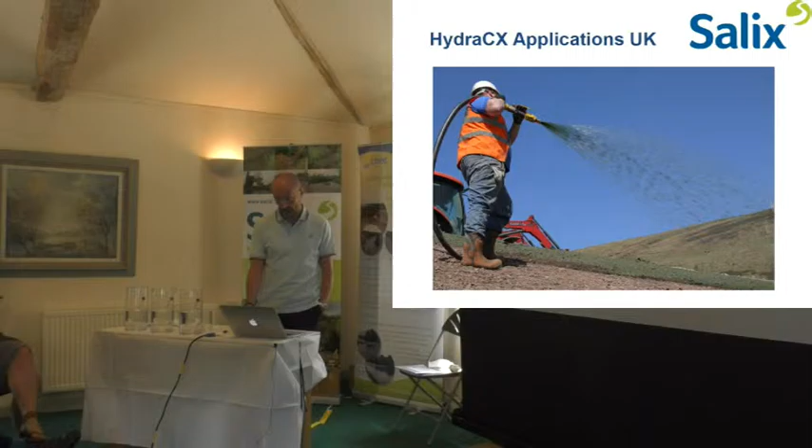Do I just press that? Yes. All right, okay.

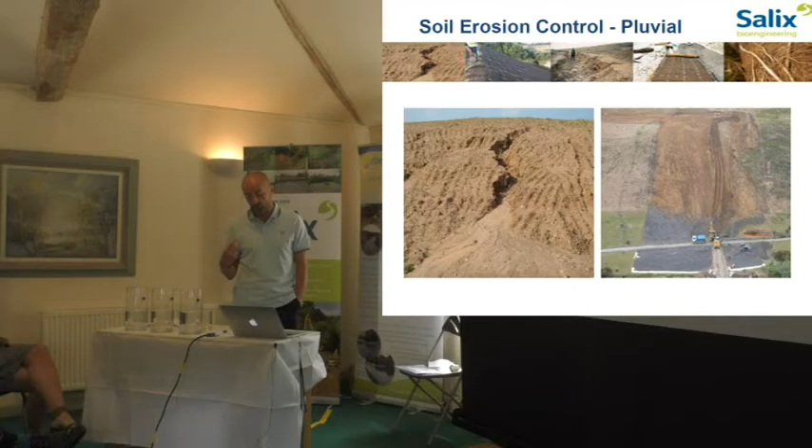So David's been talking, and most of the schemes that have been discussed have always been about fluvial processes. With HydraCX, it's simply for rain erosion, so pluvial scenarios, rain erosion typically rather than channels. We don't use it for channels because it would get washed out. But where we're using it is more for bank protection and vegetation establishment.

So your old style way of doing it, still done today, is a series of different materials. We go from open jute netting, the cheapest form, to biodegradable blankets. And then this shocker here is on the M25, where the local contractor bought the cheapest, nastiest bit of plastic matting he could find, and he's rolled it over a fairly small embankment. It's so dense, this stuff, 6 months later nothing had grown through it.

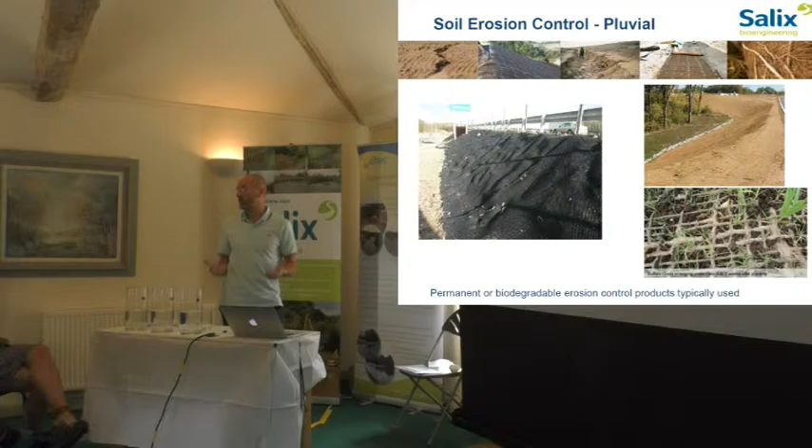It's fairly appalling. So what we want to do is try and get away from having to use rolled erosion products when you don't always need to use them. Hence the idea of using this HydraCX.

So basically, what is it? I came back from America. We went over the first time with a sample. I got stopped by the guys with their dogs and everything, because I was carrying a bit of this stuff in my pocket, and it does look like something you could smoke rather than spray.

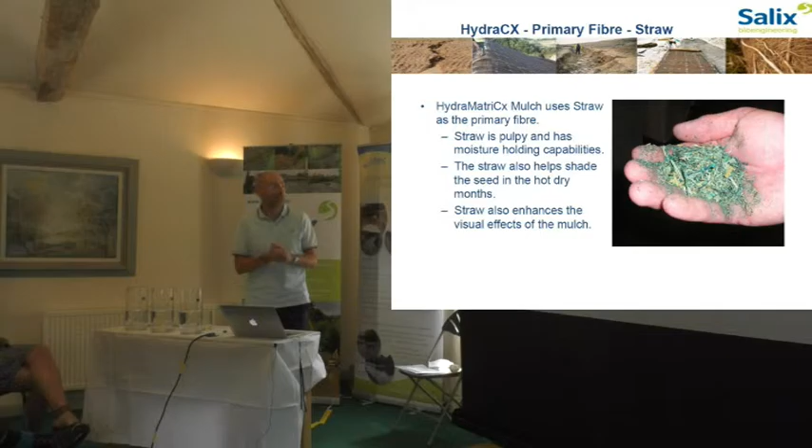But basically, the primary fibre is straw. Straw is quite pulpy and has a moisture holding capability. What it also does is, when it's down on the ground, it gives a little protection for that little seedling, a nice comfy little bed for it to be happy and then grow in the future. So it's also there as a visual effect, apart from the mulch.

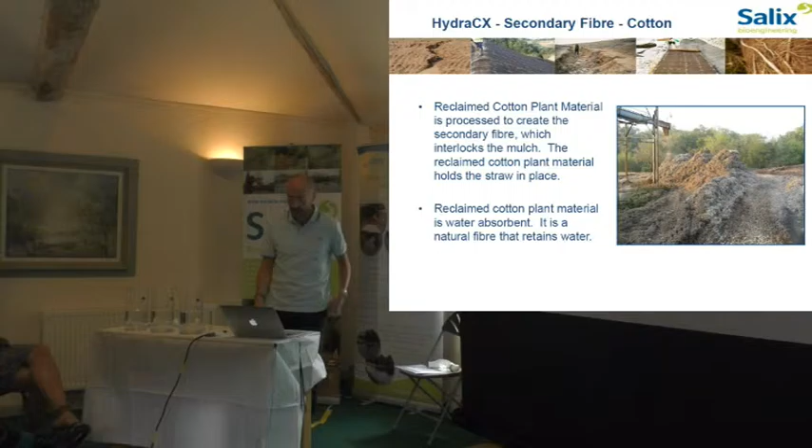The secondary fibre within the HydraCX is cotton, and cotton's very absorbent. It's also used for interlocking this mulch and keeping the seedlings in place when you get heavy rain. The cotton comes from Alabama. It's recycled cotton plant material, and it's obviously a natural fibre, so it retains water very well.

The third ingredient is tackifier polymer, so that's basically the glue. If you place this on the ground, the first heavy rainfall is going to wash it out. So the only way we can stop that is by using these polymers to actually glue it together so that it can take a decent rain event.

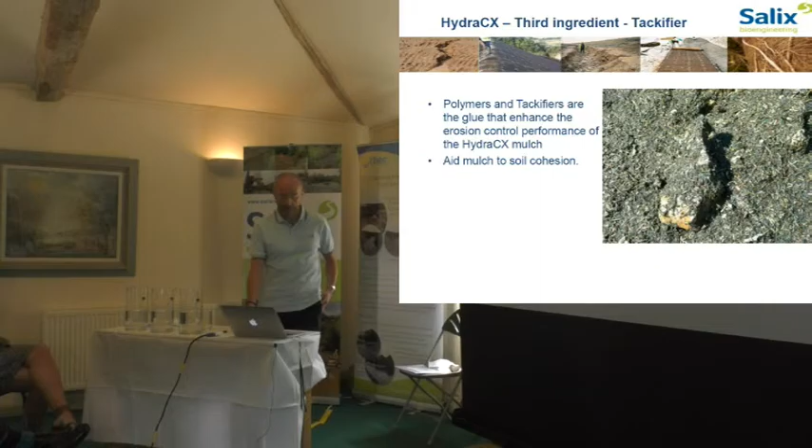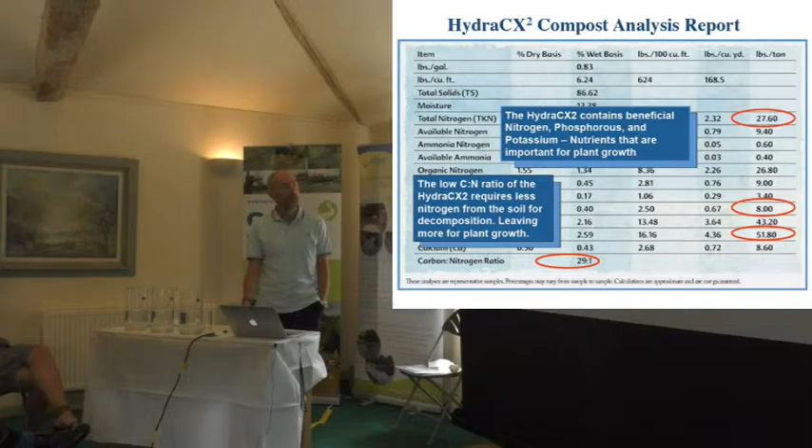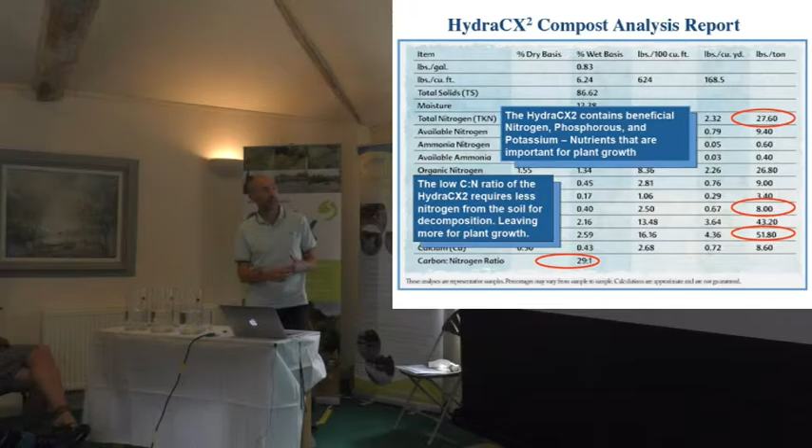There's been various compost analysis done, with quite a lot of research on this in the States, like in other countries. A lot of analysis on toxicity to make sure it's a perfectly good product. It has NPK - nitrogen, phosphorus, and potassium - a reasonable amount naturally. A lot of other mulches on the marketplace are wood or paper based, and when they break down they take a lot of nitrogen from the soils. With HydraCX, when it breaks down over maybe 12 months as it decomposes, it actually leaves a bit of nitrogen for the plants, and it has quite a low CN ratio.

There's also been a lot of research done on artificial rainfall events, just to see what rainfall events this product can take, and it's been in excess of 4 or 5 inches rainfall event - very high, much higher than we'd typically get in the UK.

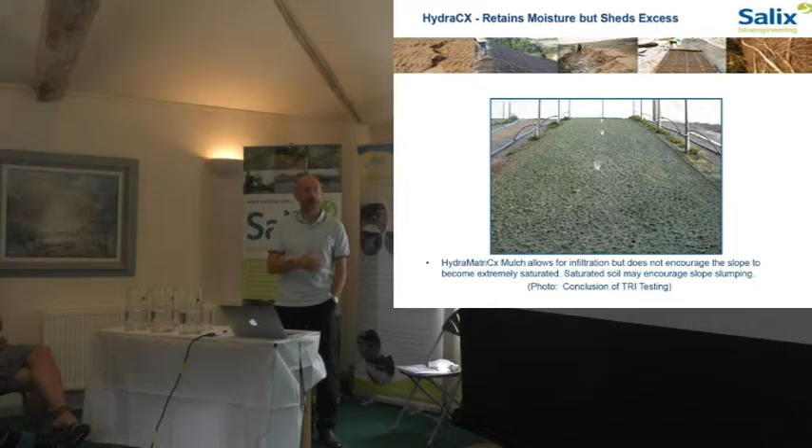I think really with any of these systems, they need a certain amount of testing before you can put them in the marketplace. So we have the benefit of all this American research that we can use now in the UK ourselves. The very first time we brought it over was in August 2008. It basically comes in over in bale form.

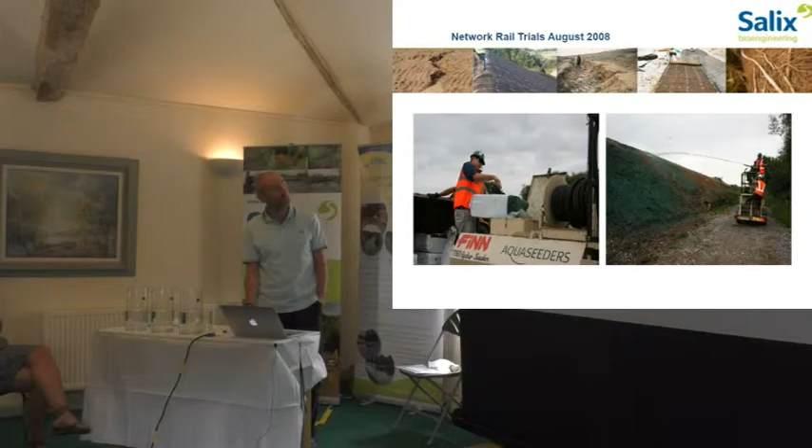We did a trial. We rang up Network Rail and said, look, we've got this product, we believe it could be really good for rail projects where maybe you've got very poor ground or you just want to get in there and get some rapid vegetation. So we did a trial for them on some embankment fill with standard hydroseeding and then the HydraCX system. This is the embankment fill here. It's got quite a lot of fine content, but there's no topsoil.

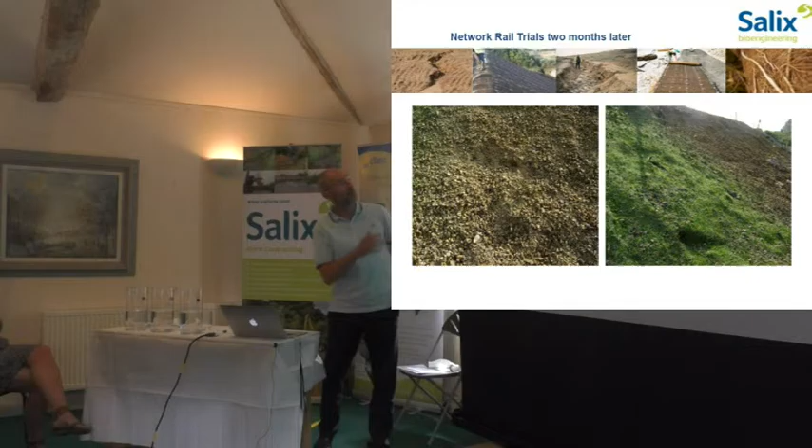So in the past, Network Rail would come in anywhere where they had no topsoil, they'd have to import it. But basically, we sprayed it with the HydraCX. You can see how it's grown within 2 months. It's grown extremely well. And further on, where the standard hydroseeding was done, it was virtually next to nothing in terms of growth. So it shows its effectiveness against hydroseeding.

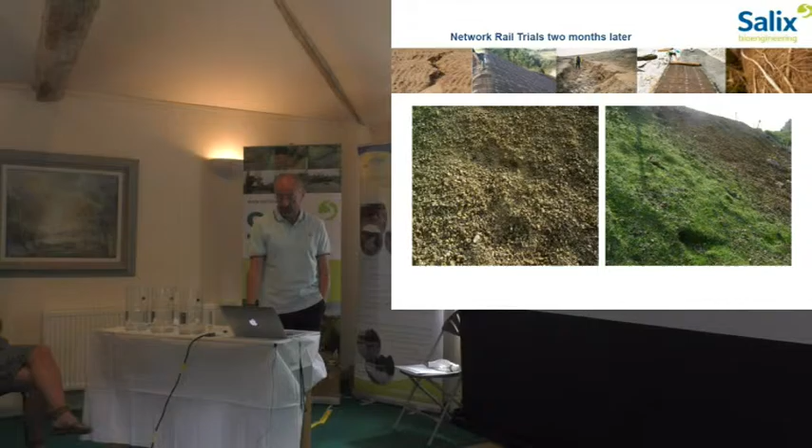With Network Rail, then they took it on board. Network Rail, when you prove something, they tend to use it time and time again. Trouble is, the engineers initially didn't quite get it, so they were specifying it together with various forms of three-dimensional mats. Trouble is with that, this is above Whiteball Tunnel here, we were spraying it on top and the mulch is so thick it wasn't getting through the mat.

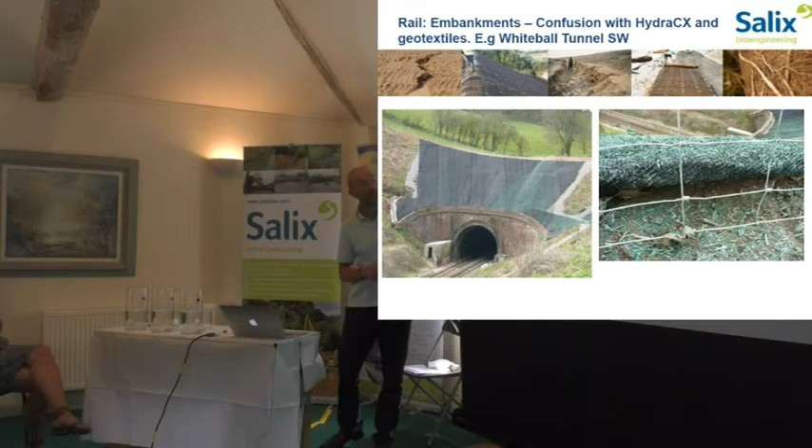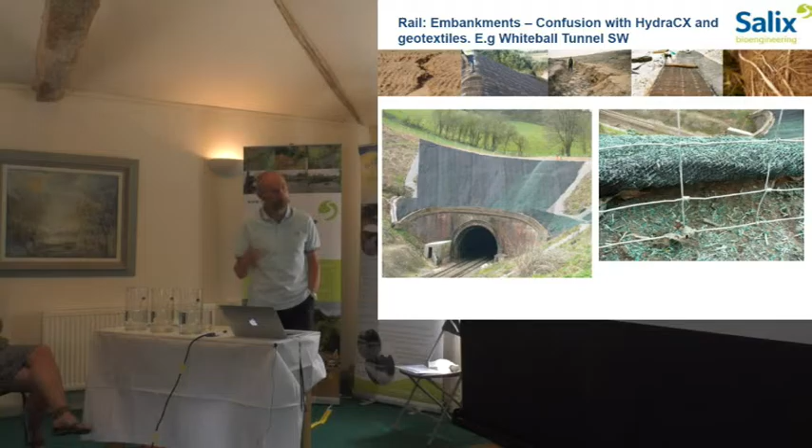We actually told them, look, get rid of this, you don't need it. We'll spray it directly onto the slope with the HydraCX, 100% biodegradable, you don't need to roll out plastic matting. So it's taken a bit of time, but over time they're starting to get that, and we're going in and doing it directly onto the ground.

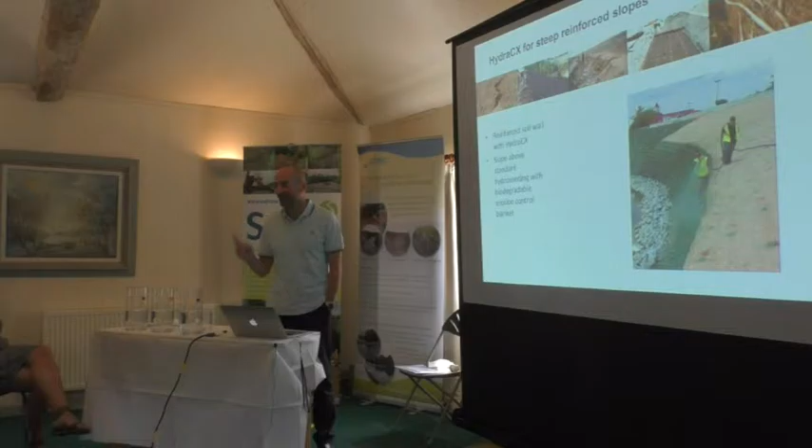So I'll give you a couple of examples. This is a bit of a shocker, the first one, in terms of health and safety, but it is in America, not here. The boys, they're working away on a very steep slope. They've got the biodegradable blanket above the slope, and then on the reinforced soil element, they've gone in there and sprayed it with the HydraCX.

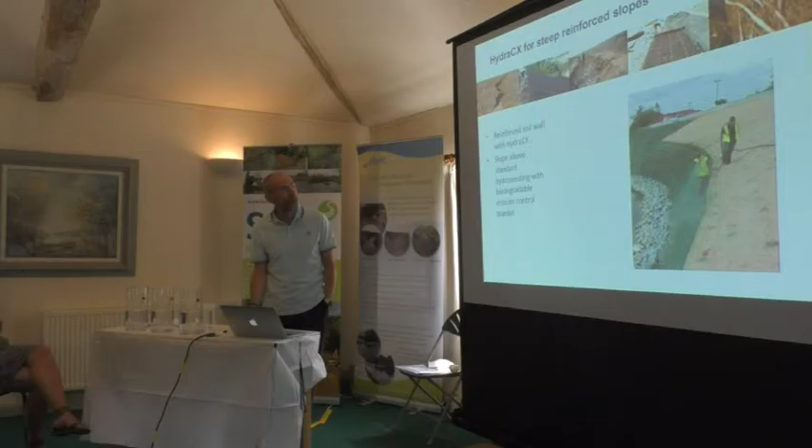The difference in growth rate is, I'd say, quite phenomenal. You've got the standard blanket above, it's growing, but not that great. The one below, with the HydraCX, it's come on very, very quick. So I would say, we sell biodegradable blankets, obviously we sell permanent systems, but in many slope situations when you haven't got any concentrated flow, it is definitely an option worth considering.

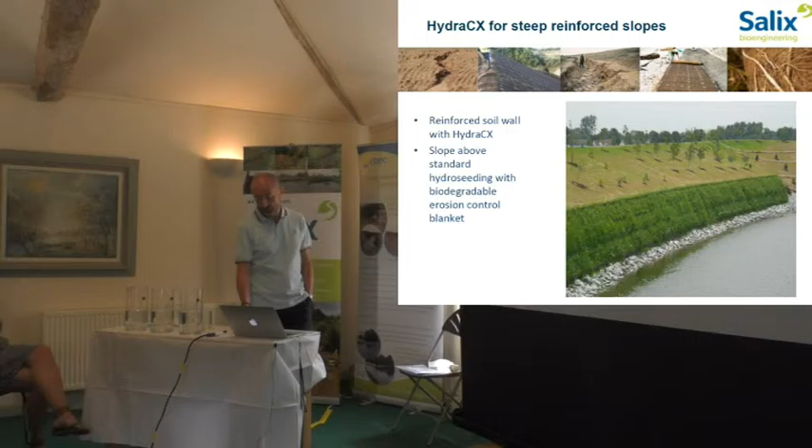Our first big job then was in Dan y Lan, Pontypridd, with Rhondda Borough Council. It's a huge, huge slip, 8,000 tonne of material. Tensar had to be involved to look at reinstating the slip. So there you can see the scale of it at the moment.

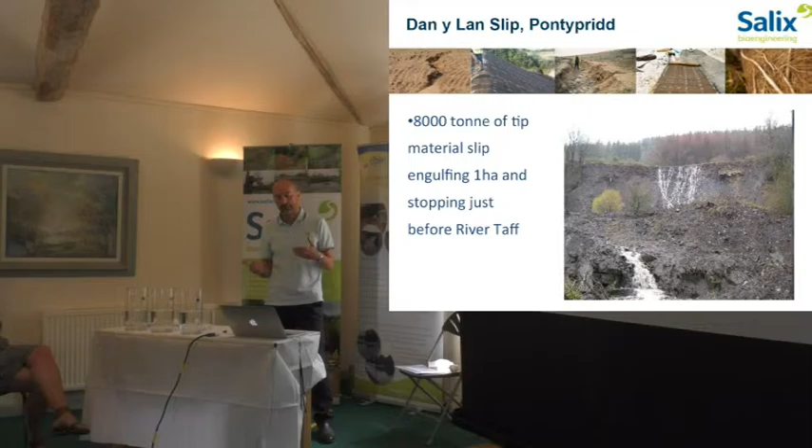It came right down. I think the whole material is like a fill material, which has got lots of nasty metals and something, I can't think of the word. But it's basically very bad material, but what they wanted to do is still use that existing material on site. So it was 36-degree slopes with geogrids, 40 metre length slope altogether.

The initial option was to look at a cellular confinement system to retain 200 mil of soil, because the ground below, which they reused, was so full of contaminants, that's the word, that they needed a 200 mil layer of soil over the top. So rather than a soil cell system in this situation, we just used a series of faggot bundles up the slope, and then the entire slope was filled with soil.

After that, Rhondda Borough Council were saying, can we roll out one of your mats over the surface to prevent any erosion? We said, look, we've got this new system, HydraCX, we'll give it a go, and hopefully this will work. So we used a local contractor that did it for us. We had no machine at the time, and they sprayed the entire slope for us.

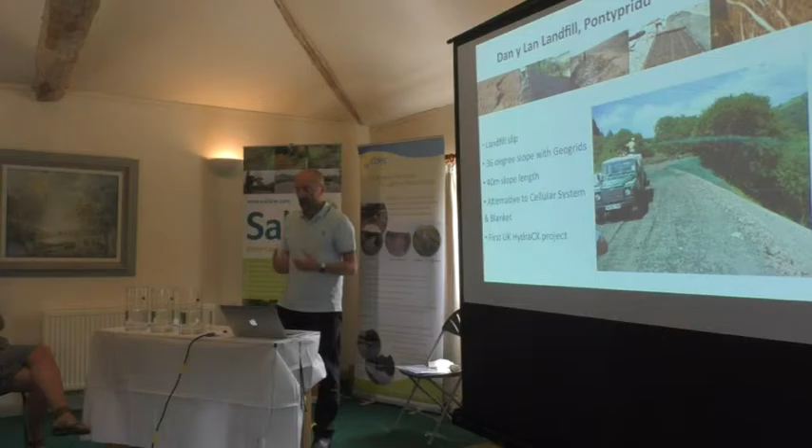First of all, when we started using the product, in America they have great big massive machines, they fire it out, and the machines are 3 times the size of these things, so the material was quite rough. And we found when we first did it, it kept blocking our machine. So most of the time the guys were taking their machine apart rather than spraying the slope. It was a bit of a nightmare.

They had to recalibrate their centrifugal pump, but over the years, they've been refining the product. Before, we had big lumps of straw like this, big chunks of cotton. Now they've chopped it up a lot neater, and it's far easier to apply. But that's basically what it looks like when it goes down on the ground, sprayed onto the surface.

We had a 3-inch rainfall event, some very, very high downpours during the time this was put down. It's a slope itself, but then again, this is on the flat area where they put some standard hydroseeding down. The difference between the standard hydroseeding and the HydraCX is, again, very, very extreme.

When we just put a lot of clovers in at the time, leguminous species just want something to grow very quickly, and so it's a very bright, green slope that stands out. But after time, that all died back, and natural species came through. And now, if you saw the slope, you wouldn't know it'd been treated.

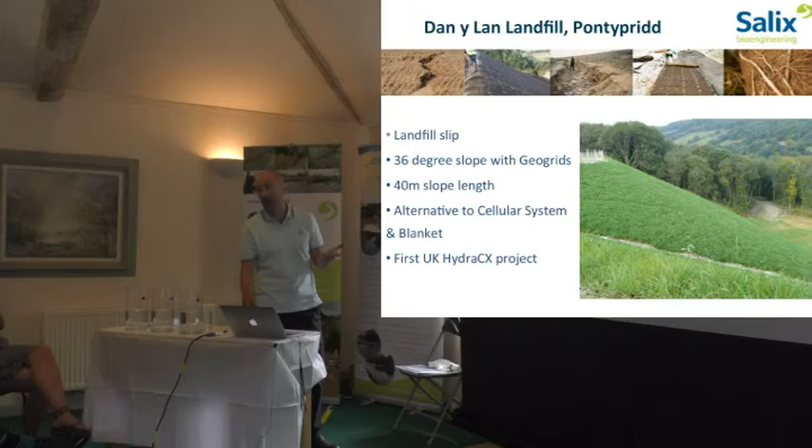What I would say, with any large slope area, we're doing a huge job at the moment, big landfill site, great big long slopes, you've got a lot of sheet flow, you've got concentrated flows in some areas, so maybe break up that surface using things like sediment stops, for example. So you can place these down within a certain spacing down the slope, maybe 10 metres or so, just to break up that flow, because HydraCX alone may not prevent that erosion where you've got little gullies forming. So this sort of option could be good to use in conjunction with the HydraCX. Fully biodegradable as well, so you just leave them in place.

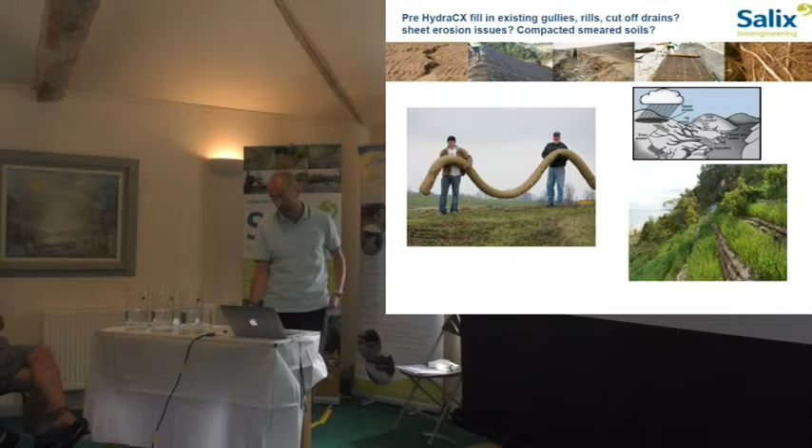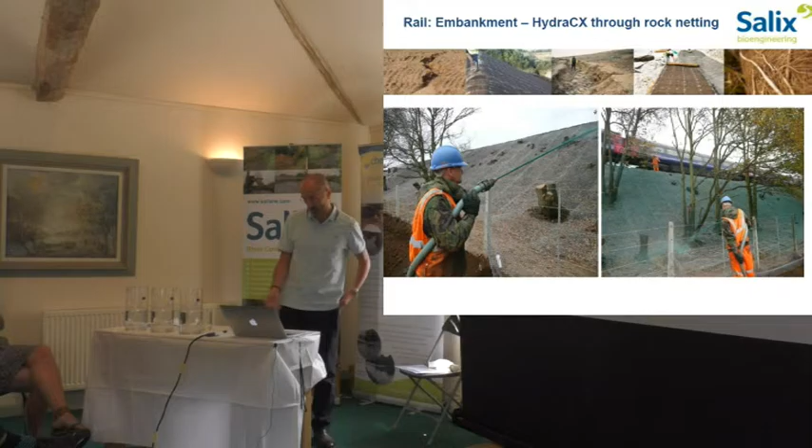So I'll give you some examples of works that we've done. Soil nailed slopes, as I say, Network Rail in the past would do soil nailing with products such as MacMat R, which is extruded black plastic bonded onto an open rock netting. It's about £10 a square metre or more, and it's not always successful when you haven't got very good ground contact. So now Network Rail are just using standard rock netting, which is maybe £2.50 a square metre, and we're coming in at, say, £2 a square metre with HydraCX and spraying it directly through that rock netting. So we're saving a load of money, plus we're not putting plastic down. So it's a winner in that sense, and we do many schemes with that.

The same about MacMat R earlier, this is a classic example. It's not just MacMat R, it's the same with any of our turf reinforcement mats. If you've got rock outcrops or a tree trunk sticking out, the geotextile tents over the surface, so it's maybe that far off the ground, so nothing's growing there. The only areas where it is growing is where it's in direct contact with the soil. So by simply using that open rock netting structure without the plastic and spraying the HydraCX through, it doesn't matter if you've got loads of undulations on the surface, as it shows here. There's no plastic underneath, doesn't matter if there's stones there, just zap it right through and get into the nooks and crannies.

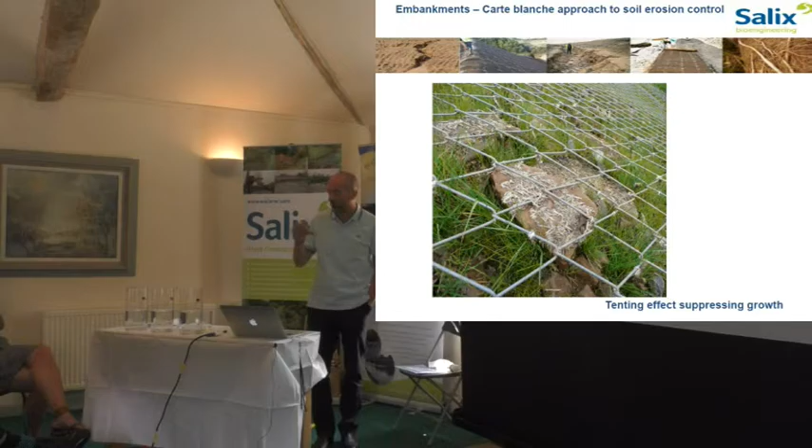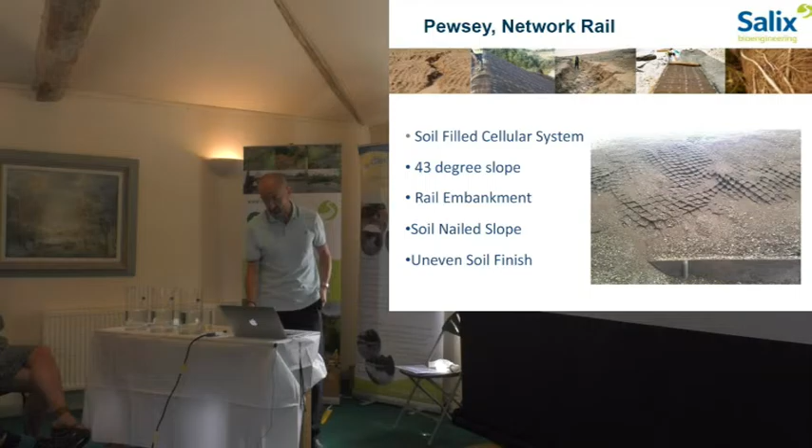Soil cell applications, you see this sometimes on motorways. This is a scheme on a rail project again, where there's a nailed embankment. Then they had to cover it because it was quite a large ballast stone, so they used a cell system. But the trouble with cell systems is you have to have light friable topsoil, which is not the easiest to fill. And when you do fill it, you tend to find the soil then slumps within it. So if you try rolling out a mat over the top of that, you've got very little ground contact and you tend to find very sporadic growth. But we basically came along to spray it directly onto the cells themselves, as you can see. And within months, the whole lot was covered.

We're actually getting involved now in zero soil applications, which has got a number of quite significant projects. This first one I'm going to show you, I never discussed it until after 3 years because I wasn't 100% sure if it would work. This is the M25 junction 18. We were working with Skanska at the time. Is that right, Skanska? Yes. And they were working with, I think it was Atkins actually.

And some of the guys there at Atkins, on this area, there was about 8,000 square metres, and the landscape team wanted topsoil brought in, like a cell system, for this 1-in-1 crushed brick slope. I was fairly convinced that we could get it to vegetate without that. But I couldn't give any guarantees, so we ended up doing this almost like a trial area, because it was at the back of the M25, the actual M25 is over the other side. There's a water company behind. So we sprayed it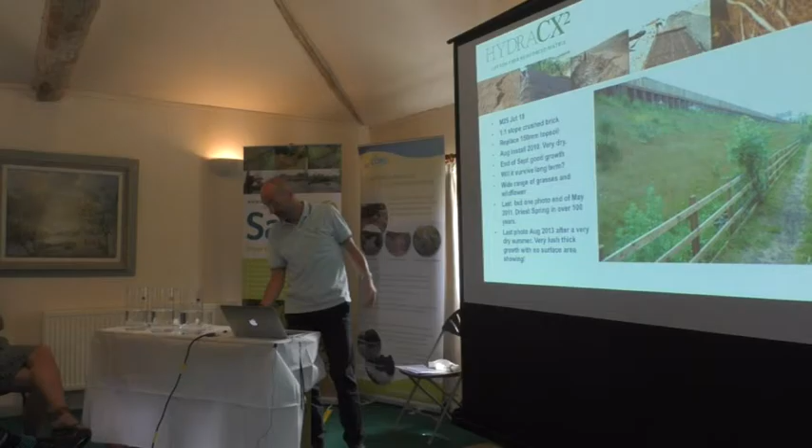So this is, I think that was end of September. This one here is in 2011. So back in 2010 when we did it, May 2011 is a little bit more sporadic, but I went back then in 2013, and the entire slope is 100% vegetated. It's actually much lusher, thicker growth than I was expecting, to be honest. So it shows that we can get away without using imported topsoil in a lot of situations.

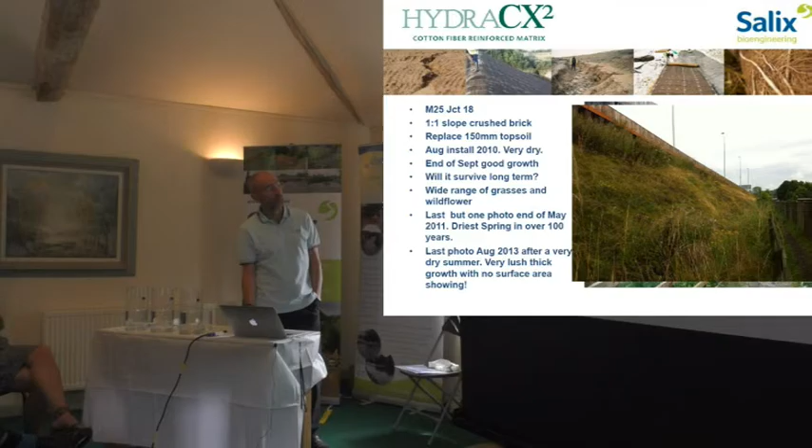An example of that actually is on the A11 as you drive up here. We did quite a few kilometres of drainage channel where Balfour Beatty were working on this area. And this is all slip form concrete. There's aquifers, groundwater underneath, so they had to line the whole channel with an impermeable layer. And I think they put down topsoils or sandy soils, which is in the area. But the first floods came along and washed it all out.

So they had to leave the liner and then bring in some imported type 1. They don't want any rutting within the channel. So they were hoping to try and vegetate this type 1 material. So we sprayed the HydraCX down on the type 1, but then we rolled a blanket out over the top, because if there were flowing events, we didn't want the HydraCX washing off. So that scheme now, you can see it when you drive along, it's working well. It's nicely vegetated. If anything, it gets a bit more moisture there, which is good, rather than a steep slope.

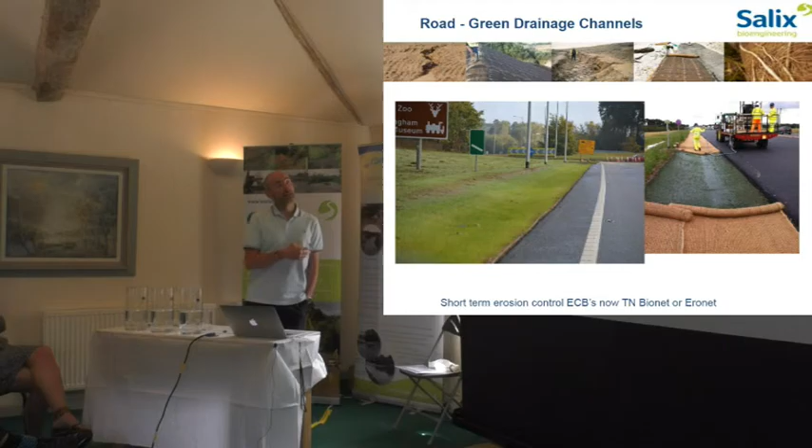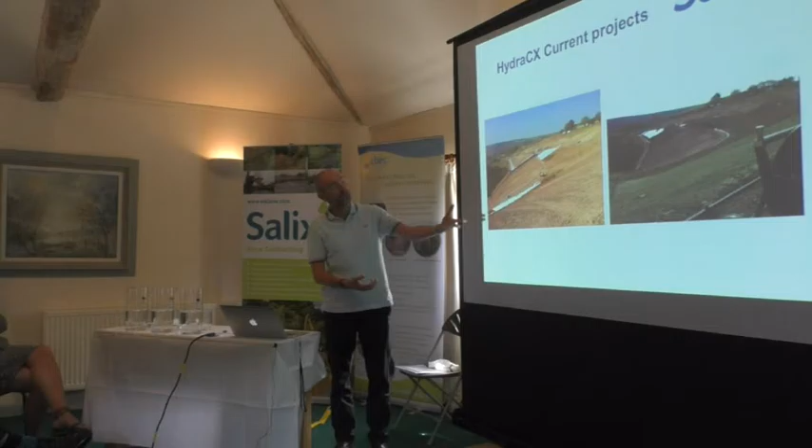So just the last couple of slides, current projects we're on board with at the moment, so you can see the scale we're getting to do. This is the Ebbw Vale site. We did the first phase a few years back. This is the second phase now, 60,000 square metres. Original design was for jute netting over the whole area, but you've got to physically get there and roll it out, which is a bit of a hassle, and pin it in place. So we're literally getting on site and spraying it on. We've got another 40,000 square metres to do.

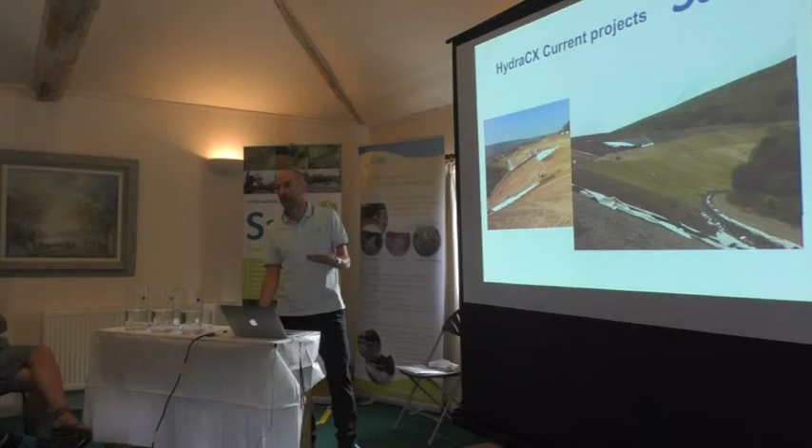This was taken a few months after we put it down. This is really poor engineered ground, and we're getting some really nice vegetation take there, even though it's been, up until recently, a very, very dry summer. Well, I will say, on this scheme, there was an area where the guys have redone the access road, and they'd built it up without a cut-off drain, and there's an area where all the rain is coming off the ground and concentrated in one flow. So it's coming down, cutting down through the bank.

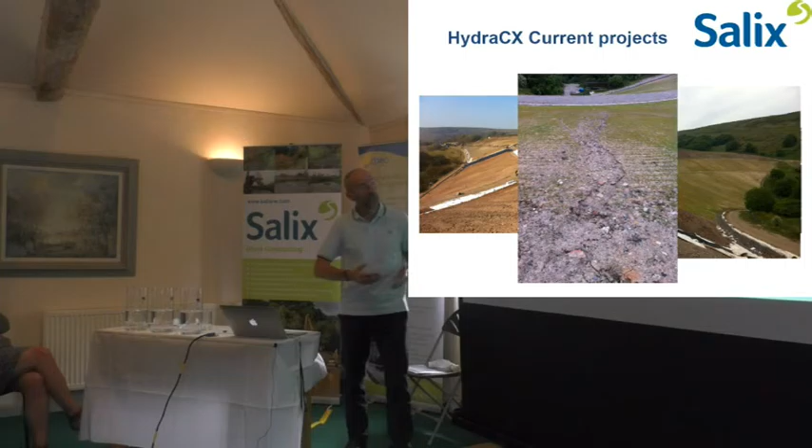So it's not magic, HydraCX. It does work very well, but it's like anything else. You do need a cut-off drain there to prevent that sort of concentrated flow. Otherwise, you will get a gullying effect. So they are going to have to go in and reinstate them.

We're doing some trials at the moment with Costain on the Heads of the Valleys, looking at various sediment control techniques instead of silt fencing. But this is an area where we sprayed with the HydraCX, and you can see very rough ground, lots of branches sticking out and lots of undulations. But we can spray it directly on there, prevent the soil erosion, and it doesn't matter that the surface is undulated.

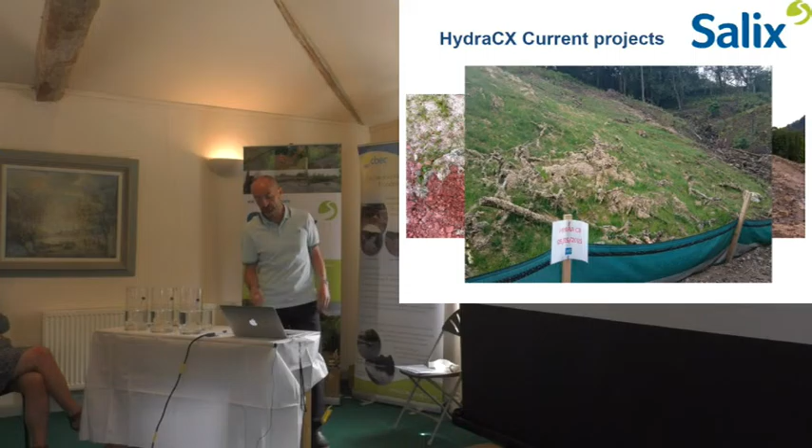Faster germination, definitely, I found compared to standard seeding, and we can also replace or reduce the need for topsoil. Health and safety issues, there aren't any, in the sense that we can often spray from the ground. On a steep slope like this, you won't have to worry about actually getting onto the slope itself. And a lot of testing has been done in terms of erosion, growth and toxicity issues.